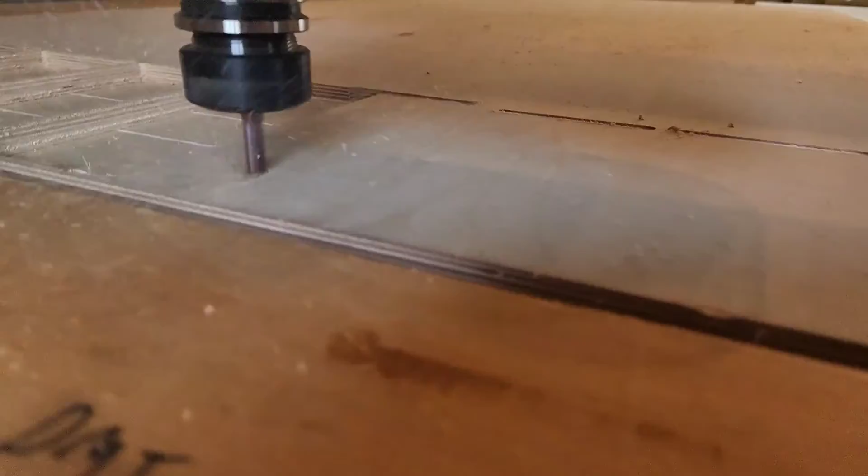First try with the regular template right from Mozaik, didn't change anything, just cut it. We did mess up which style we wanted here, so it should have a pointed pin on it. Our gaps were also a little bit big, might be because of that as well. And we also have these weird holes which we're going to just get rid of altogether. We accidentally ran the rounded over bit instead of the proper one.

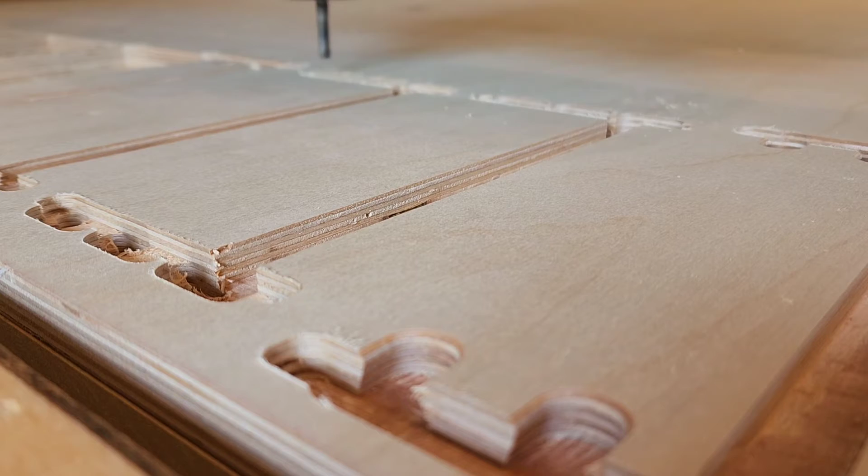So you can see down here there's traditional square and then the radius bit. So the radius one is what the first setup cut for us. We changed it to this, and so the second version, the tails are pointy now, so that's one good thing. We still got that slop there, so we just adjusted one of the tolerances in Mozaik.

So here you can see you can set up the different thicknesses, the tolerances, the pins and tails, how far apart they are, everything like that. So we did a few different options here, and what we ended up settling on was a 5/8 inch wide pin. And the reason for that is so that it's wider than our drawer bottoms.

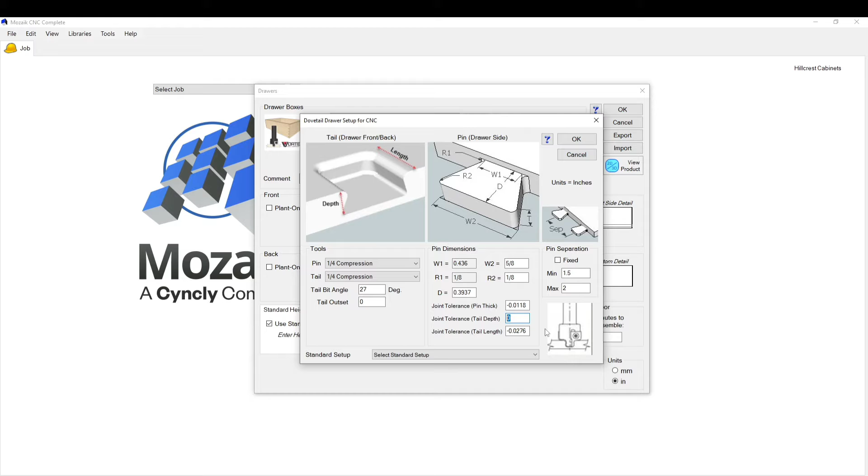We also changed the tail depth tolerance to 0. As you can see, I was getting a little bit of issues with the interior joint having a little bit of a gap there. So we changed the standard number here to 0. So third attempt. I think we can live with this. It's pretty flush. Came right off the CNC like that. Inside's pretty tight.

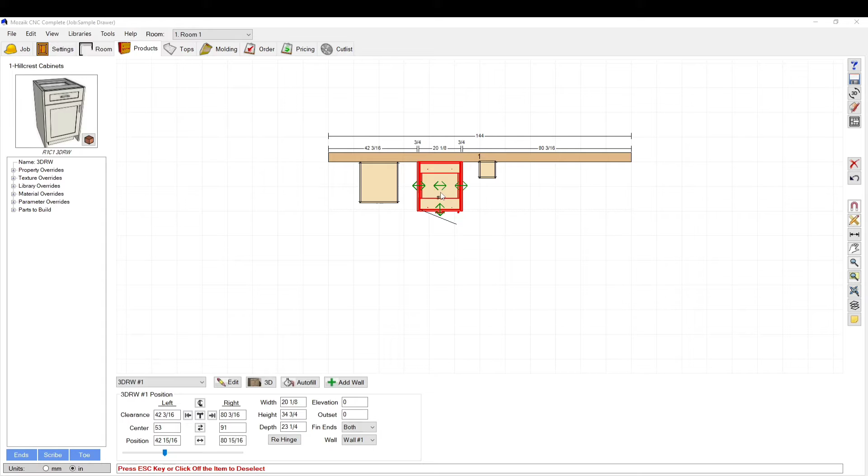So once we had done that, we then had to set our standard heights. So that took a little bit of messing around. So we had to go into a job. So this job here is strategically just made for testing out our dovetail drawer boxes. We dropped in just a standard drawer box, but there's something going on in the way that Mozaik exports the formulas that it didn't come out the proper size.

We didn't get the right size until we actually put it into a cabinet. That's why we had this cabinet in here. Once we put this cabinet in, then it came out the size that we wanted it to be. So just be a little careful of that.

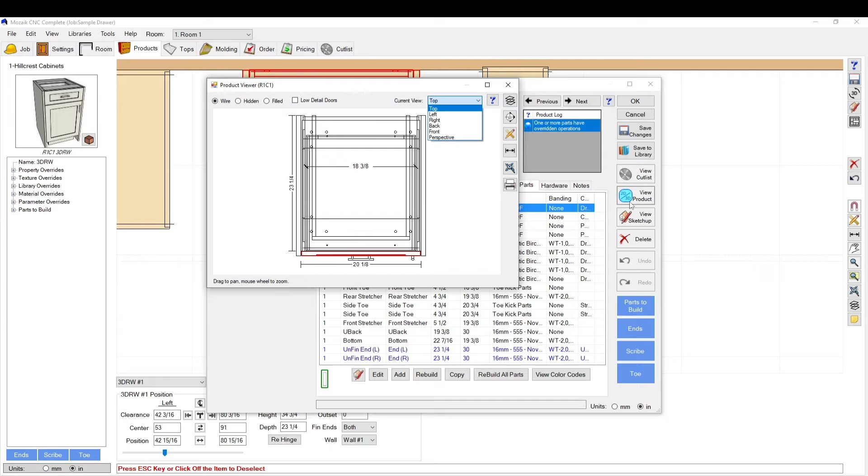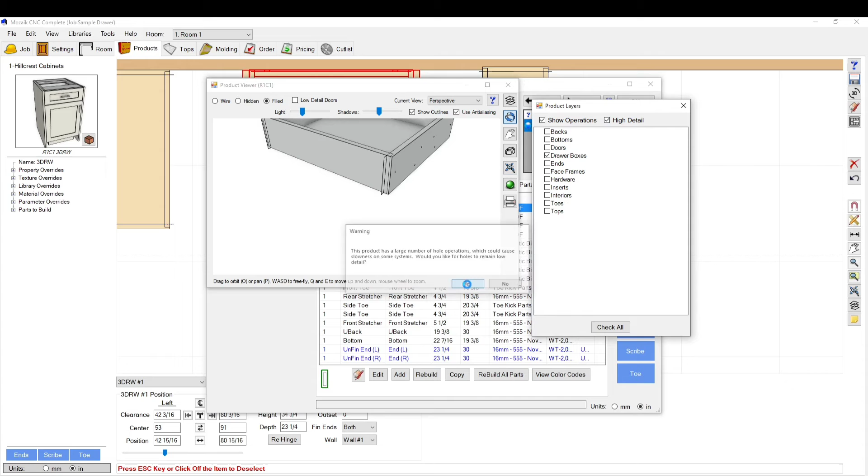So the way that we were able to sort of digitally figure out things was you hit the 3D view, perspective, filled, then you hit the little layer button here. So we only really want the drawer boxes, so we can just deselect everything. Okay, so you can see we just have the drawer box, and if you click this little high detail button and click yes, it's going to show you your actual dovetail pins and tails.

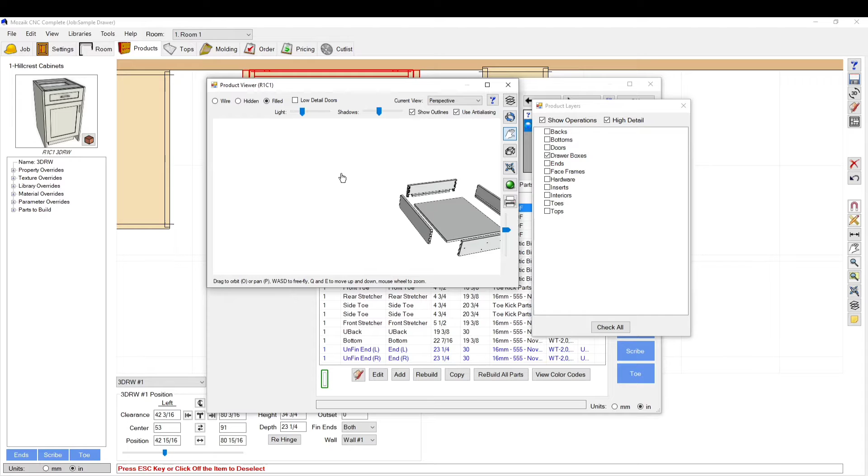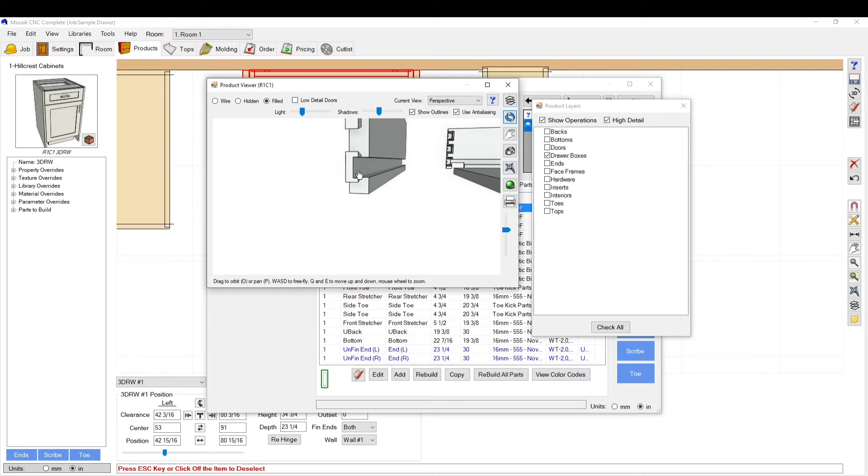So if you also select this, then you can slide that up. It'll explode it a little bit so you can see what you're looking at. So this is what I had used to figure out exactly how I wanted this to work out. I set this like this. I wanted my drawer bottom to be perfectly in line with the tail here, so that it's not interfering with the edges of the tail, which in this part of the drawer box, if it ever chips or anything because of the drawer bottom, it won't show anything once you put the tail in.

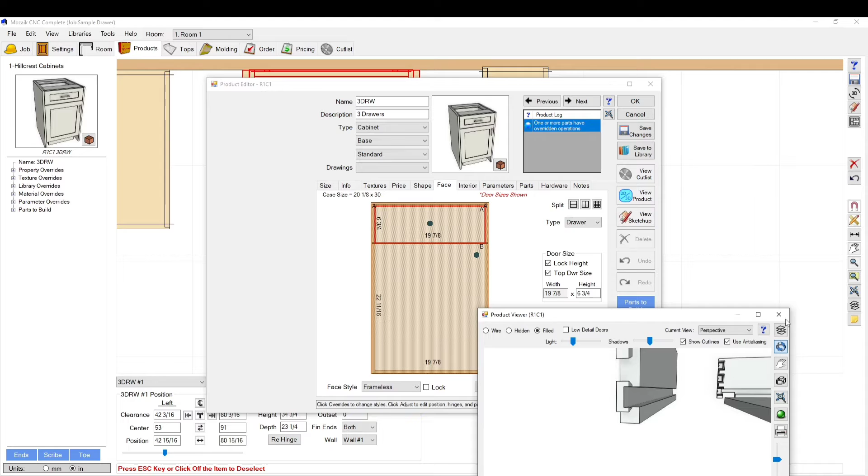So what I ended up doing was, let's get out of here, go to the face tab. I kept modifying my front height, which would in turn modify the drawer box size until I found it was perfectly in line. And then I just went through all the different heights until I found all the heights that were perfectly in line with the tail. Once I figured that out, I went to my drawer boxes, and I'll show you my setup. Set this as standard heights. Once you activate that, it brings this up, and then you can paste those numbers in there for how high the drawer boxes are.

Or I should say the next step is to go to the drawer parts menu, go to the drawer side to see how high it actually is. Copy that number into a notepad or something as you go, and then just keep making this height taller. 7, 7.5, and you can go back here and see what the drawer.

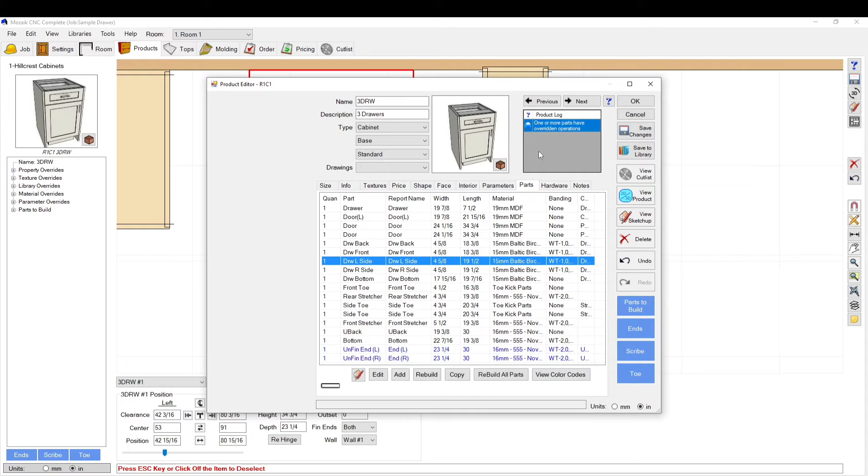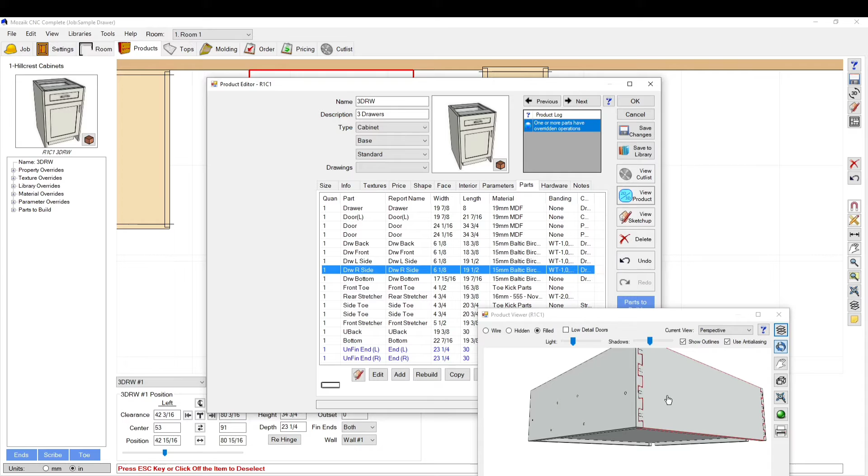Mine are set to stay on my set drawer heights, so it won't jump unless I make it jump to the next one. So you see it's jumped to 6 1/8. And if I go back here and I go like this, high detail, yes. And I just exploded it a little bit. Again, you'll see that my tails are perfectly in line with my drawer bottom.

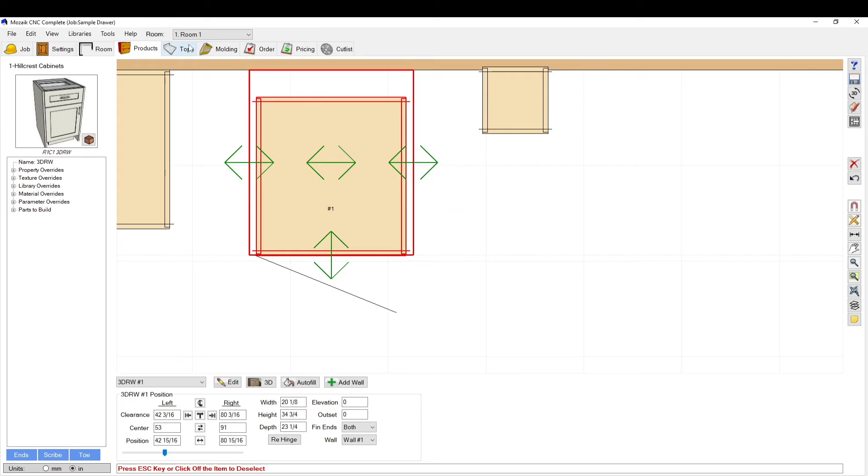The next thing that I did was add the notch to the bottom, or the back, because we only notched the backs of our drawer boxes. So I had to add this notch in there for undermount drawer slides. So I just shaped my part for that to appear. Added a few pre-drill holes that are run by formulas. So as it stretches in width, you can see it'll add extra holes or make it a double hole or single hole.

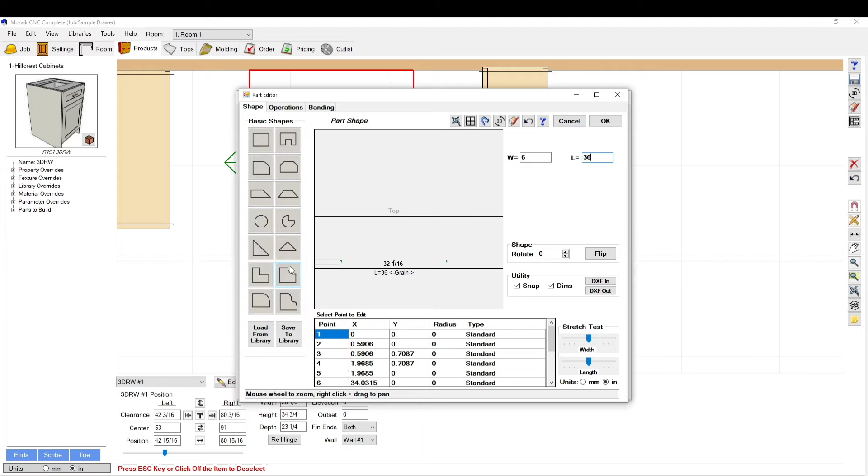The drawer bottom's not going to follow, or the dado, that's built by the library, so it's not going to do anything there, but any operations you add, it'll still do it right when you export it to the cabinet itself.

The last thing that I have to do is add this hole for the 1/4 inch hole or 6 millimeter hole for the back of the undermount slide, the little pin that locks into that hole. So in order to do that, we're going to go drawer boxes. I'm going to do it in my standard one. I'm going to go to the back detail operations. We're going to bore a hole. Our drill is set up for a 1/4 inch. Not exactly 6 mil, but close enough for what we use it for.

And in order to get it, it's 21 plus 7. So that's the full distance from the outside edge to here. Minus 5 millimeters. So 23 millimeters from outside edge of the drawer box to the inside.

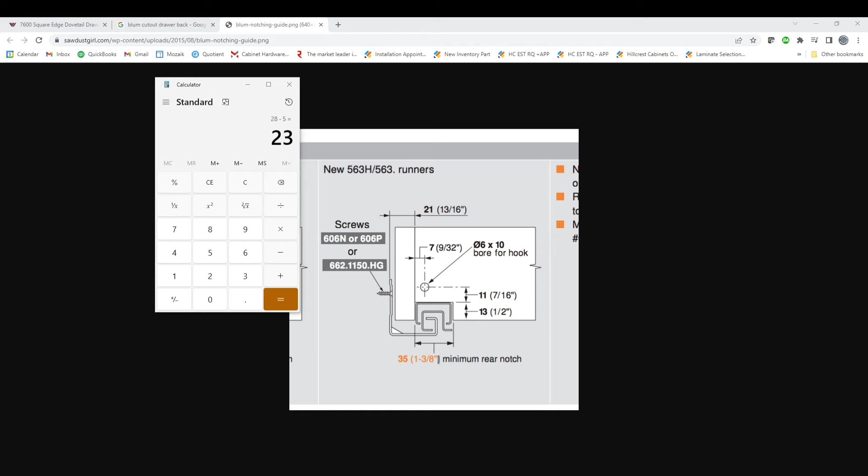Now I have similar operations that I can copy from that I might do instead. So I'm going to go to my current drawer box. I'm going to go to my back. This is where it's so convenient if you've built everything with formulas. If you haven't, it's not going to work. Oh, you can see that I haven't built this with a formula, so I can't actually copy this one. But I can use it as a reference.

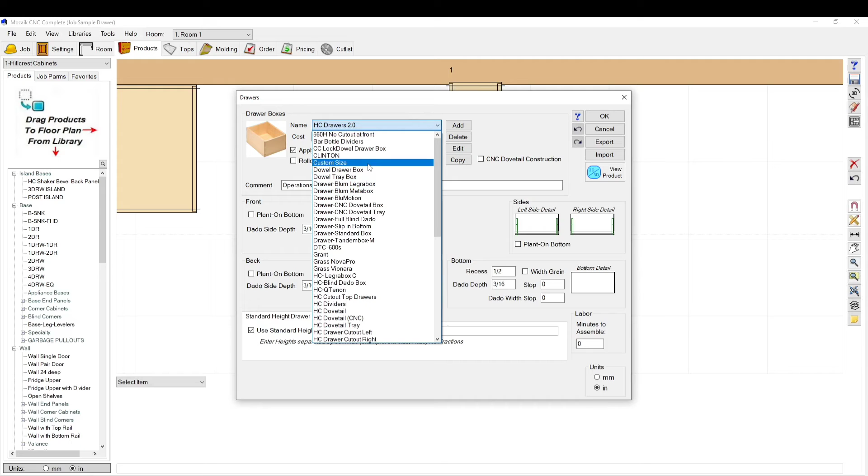So front and back of a dovetail drawer box is actually the full width of it, so it's easier to calculate that way. So we're going to go back to my main one. We're going to click the back. We're going to bore a hole. It actually needs to be a through bore, so we're going to make the depth equal to the drawer back .th, so that's going to call up the thickness of the back every time. We're going to change it to millimeters. This needs to be 23 millimeters.

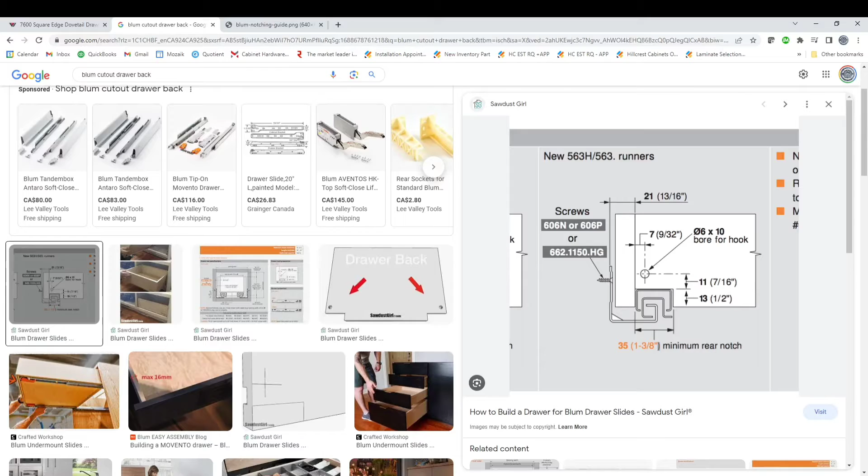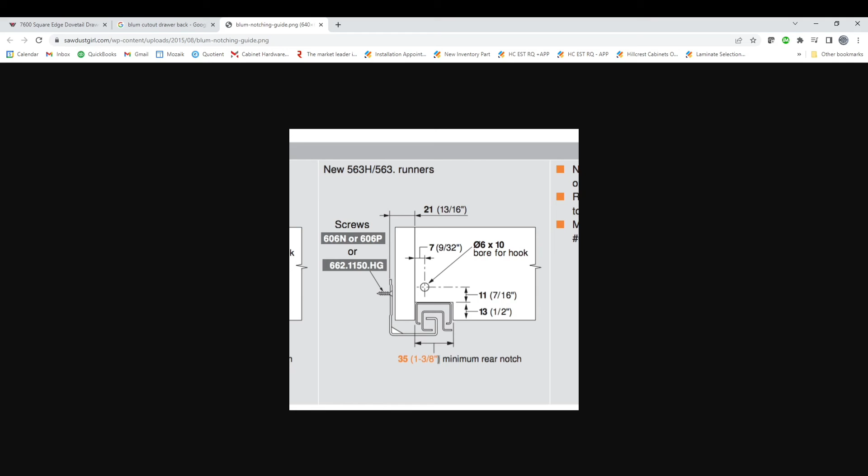This right here, oops. Let's go back to that there. So it's 11 millimeters from the bottom, or 13 millimeter half inch from the bottom of the drawer box itself. We can just say 24 mil. So the Y is the elevation, 24 millimeter. We don't have to write millimeters, sorry. Click OK. Then I'm going to make this 5 millimeter, or it's actually a 1/4 inch.

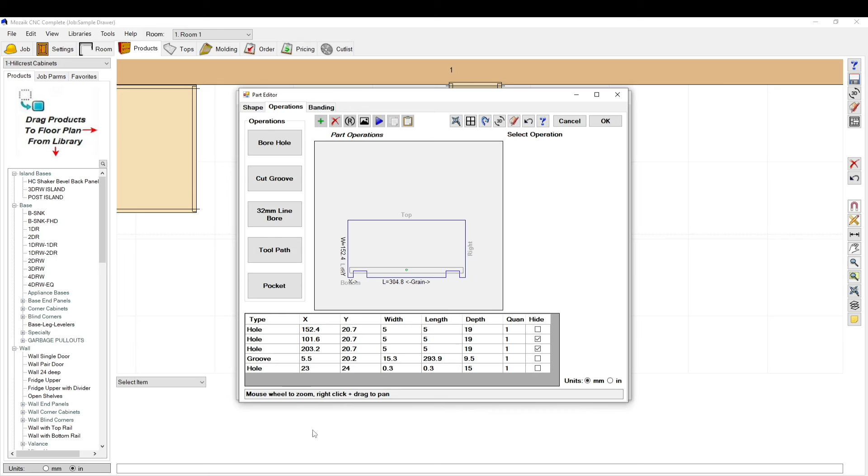What happened there? Click that, 0.25. Oh, I see, it's in millimeters. So it's kind of like 6, but I need to do it in actual inches, because that's how my drill bit's set up. So now I got that set as a 1/4. I'm going to copy paste that.

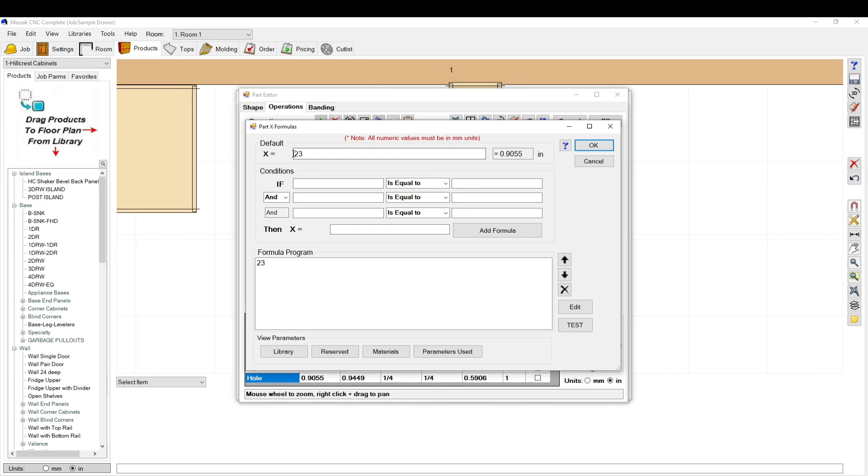I'm going to go back to my X. I'm going to go part length minus 23 mil. And that's the same, 24 mil up from the bottom. So that's it, you're good to go. Got your 2 holes, through bore, so it's just going to drill right through, one-sided operation.